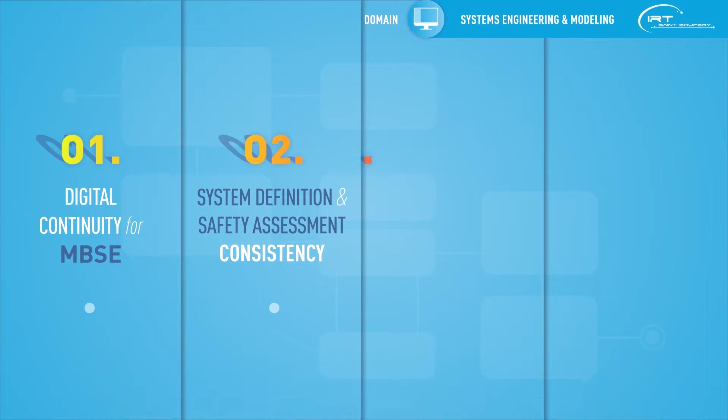The project tackled 4 thematics. 1. How to exchange and aggregate heterogeneous modeling data across the extended enterprise. 2. Ensuring consistency between safety analysis and system definition models. 3. Generation of a co-simulation environment based on the system architecture description. 4. Improvement of the need elicitation using models in a customer-supplier relationship.

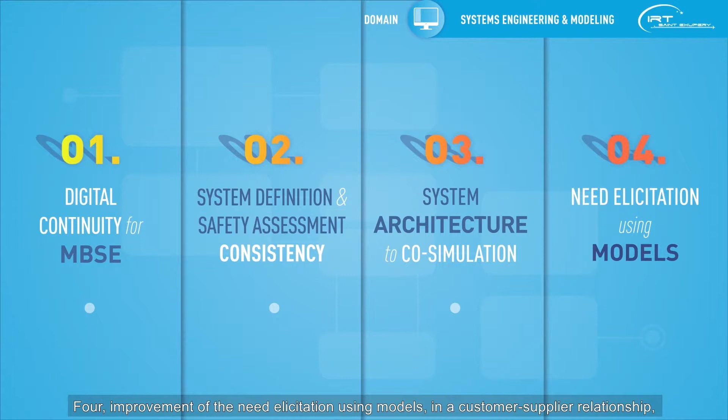To be certified and be allowed to fly, aircrafts and embedded systems must comply with airworthiness regulations. Safety teams support certification activities. They assess the system conformity with safety requirements, and make sure the system fulfills its functions with the appropriate level of confidence.

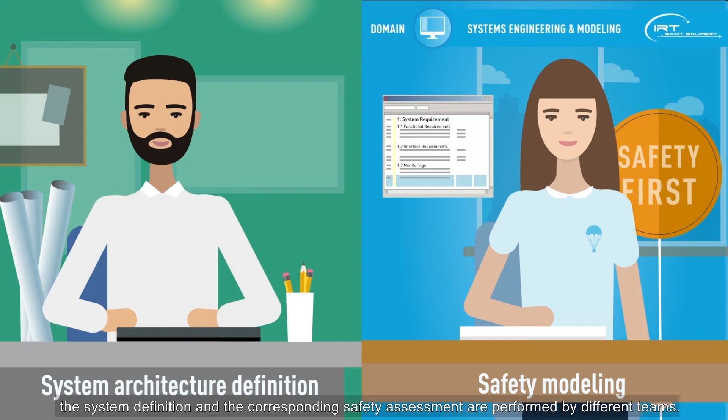System architects have to take into account different points of view during systems development. In order to successfully integrate all constraints and requirements, they need to rely on an efficient process. In particular, it is critical to manage the risks related to safety aspects as soon as possible and all along the development. Usually, during development of critical systems, the system definition and the corresponding safety assessment are performed by different teams. Information is available in textual or informal graphical form.

Based on provided system description, fault tree models are created by safety specialists to support safety analyses. These safety models are then validated during reviews involving both system and safety engineers. These reviews provide the necessary level of confidence to perform the architecture safety assessment. This is a highly iterative process.

Besides, the use of different data formats for requirements and fault tree models causes communication issues between both teams, and makes it difficult to efficiently validate safety models or to trace the outcomes of the reviews. In this context, keeping track of system modifications and maintaining the consistency between the safety analysis and the system definition is a complex task.

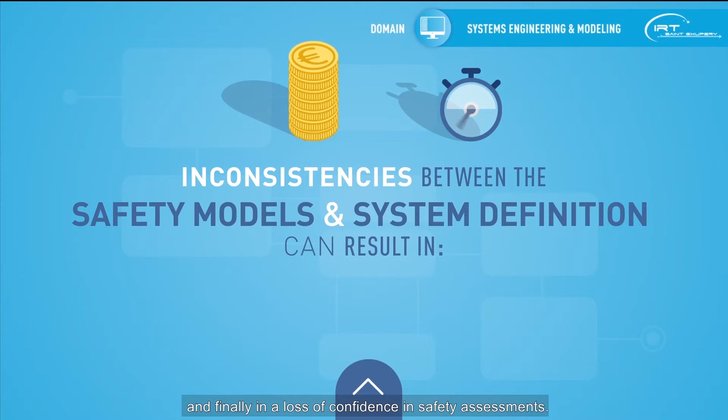Inconsistencies between the safety models and system definition can result in overdesign due to misunderstandings or unnecessary conservatisms, additional iterations, leading at worst to late design changes, and finally, in a loss of confidence in safety assessments.

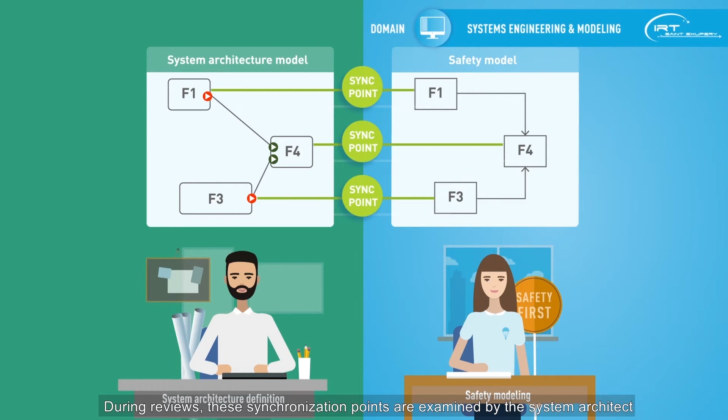MOISE project developed a model-based methodology allowing to maintain the consistency between a system description model and a safety propagation model. Models' elements, such as functions, are explicitly linked and traced by the synchronization points. During reviews, these synchronization points are examined by the system architect and the safety specialist, and possible structural discrepancies between models are commented and justified, in order to guarantee that nothing is inconsistent.

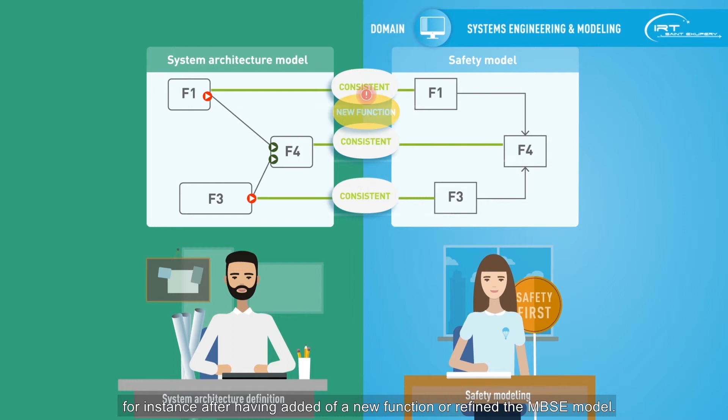When the system architect modifies the architecture and releases a new version, for instance, after having added a new function, or refined the MBSE model, it is possible to detect and indicate that changes have been performed. Then the safety engineer knows where he may need to update the safety model.

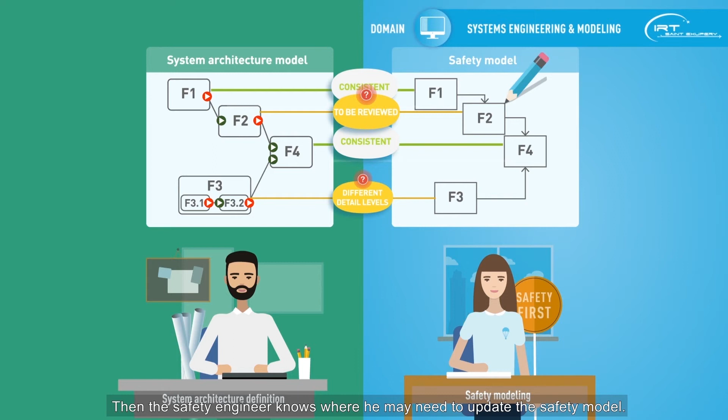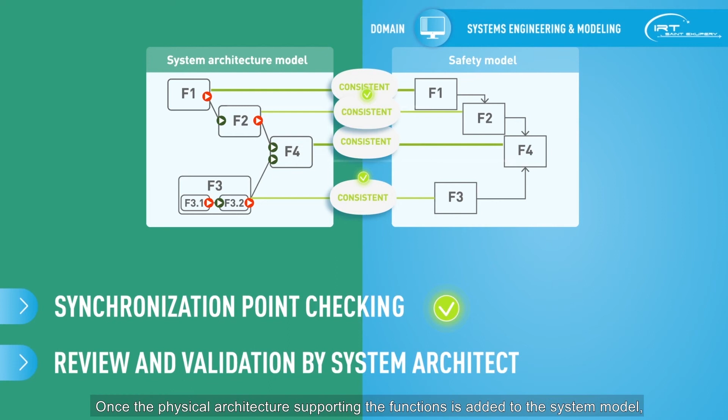Safety model reviews are structured in order to identify whether or not the two models are consistent, and outcomes of the review are formalized. Once the physical architecture supporting the functions is added to the system model, a similar synchronization is performed at the physical level. In the end, functions, sub-functions, allocations, equipment and interfaces are synchronized.

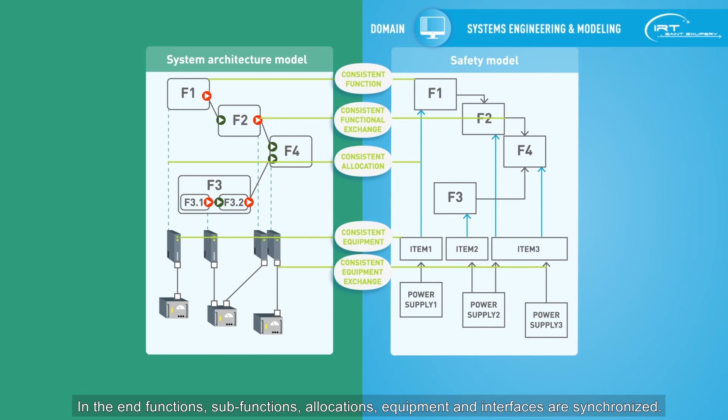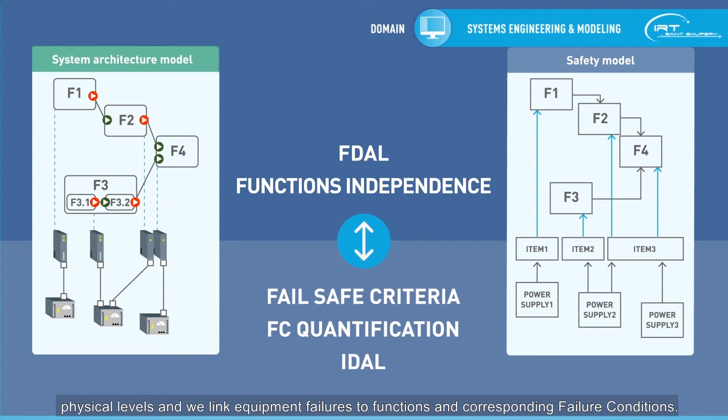From the safety assessment point of view, we provide an analysis at both functional and physical levels, and we link equipment failures to functions and corresponding failure conditions.

In summary, we propose an innovative model-based synchronization method to efficiently assist system design and safety analyses consistency reviews. This method is supported by methodological guidelines for MBSA modeling and assessment, and has been successfully validated on a representative study case. This work will be continued in a new project led at the IRT Saint Exupéry, called S2C for Model-Based System and Safety Continuity.

MOISE project also produced transverse outcomes that supported our activities. A study case of a drone for aircraft pre-flight inspection. It is composed of architecture models, safety models and behavioral simulation models, some of which are open source and can be downloaded from the IRT Saint Exupéry Forge.

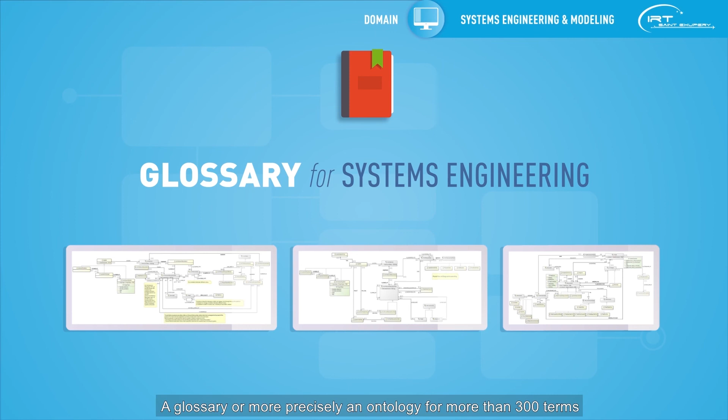A glossary, or more precisely an ontology for more than 300 terms relating to system engineering, constituting a valuable common reference. And part of our state-of-the-art review is structured databases of 230 ID cards for MBSE methods, languages and tools that can be accessed online by our project members.